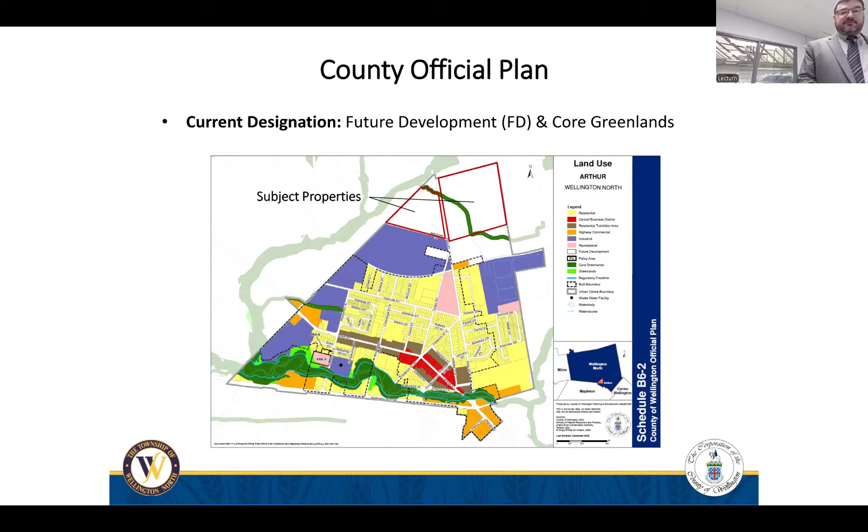The property is currently designated as future development and core greenlands in the County of Wellington official plan, and is currently zoned future development in the Township of Wellington North zoning bylaw.

The Wellington North Growth Management Action Plan identifies the properties as a future development area.

To discuss the proposal: an official plan amendment, a draft plan of subdivision, and a zoning bylaw amendment application have been filed with the County of Wellington and the Township of Wellington North for a proposed residential development.

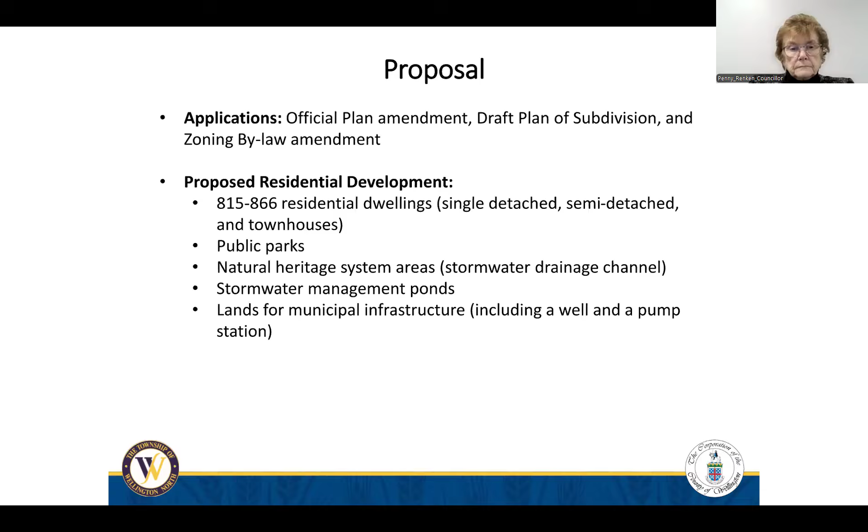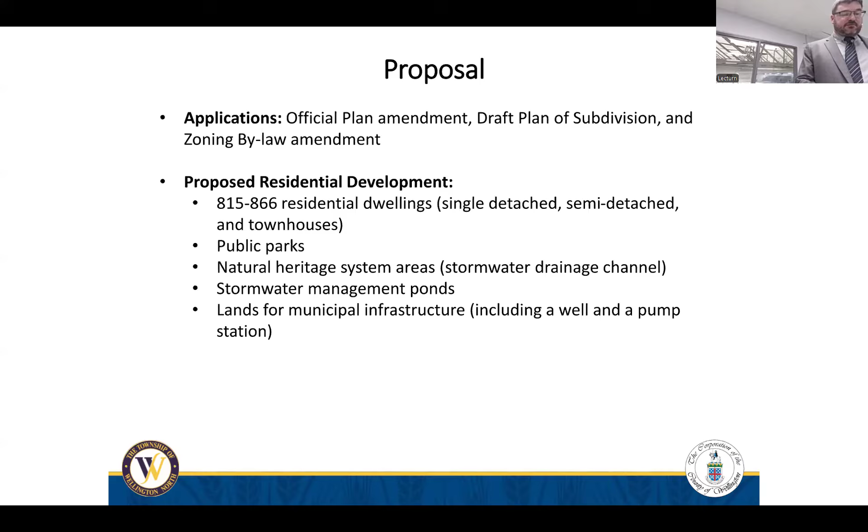The proposed development includes 815 to 866 residential dwellings, including single detached, semi-detached, and townhouse dwellings. It also includes public parks, natural heritage system area, stormwater management ponds, as well as lands for municipal infrastructure, which could include land for a well and a pump station.

Shown on the screen here is a color concept plan which shows the proposed development's layout.

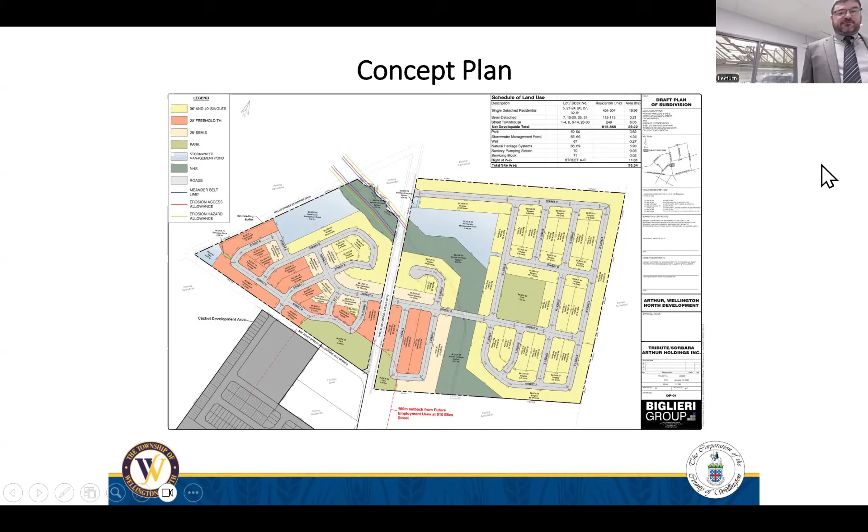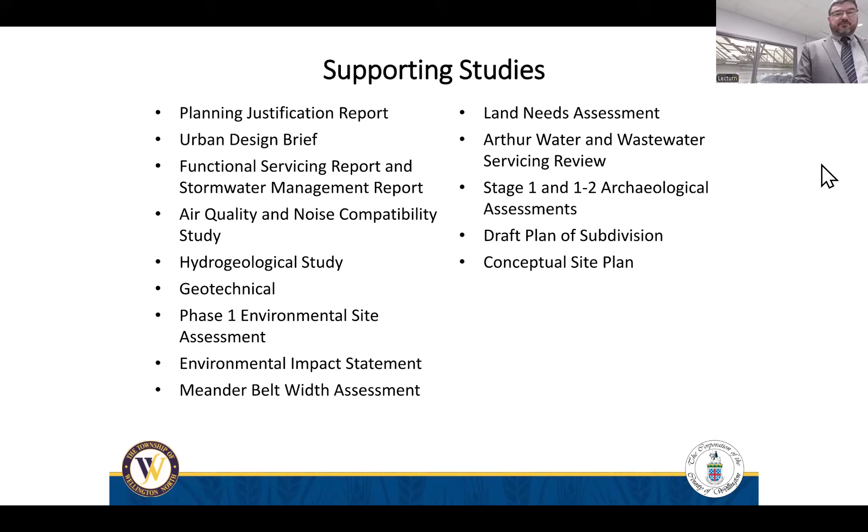A series of supporting studies have been submitted to the township and county in support of the applications. These studies have been circulated to departments and agencies with the applications for review. I'm not going to go through all of them, but there's a list.

The purpose of the official plan amendment is to redesignate the lands from future development to residential and open space. This is a draft of the applicant's proposed official plan amendment schedule.

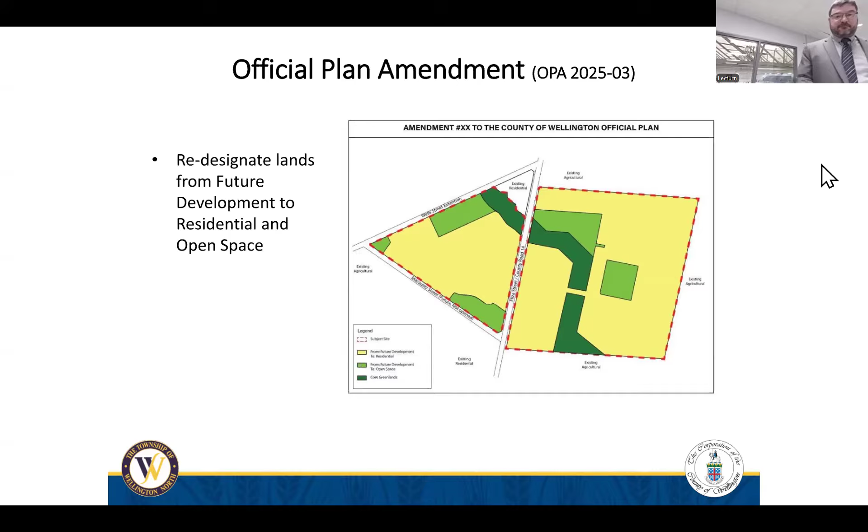The proposed draft plan of subdivision includes 454 to 504 single detached dwellings, 112 to 113 semi-detached dwellings, 249 street townhouse dwellings, 3 park blocks, 3 natural heritage blocks, a pump station and servicing blocks, as well as stormwater management blocks.

The proposed access to the site would be from Eliza Street and from Macaulay Street.

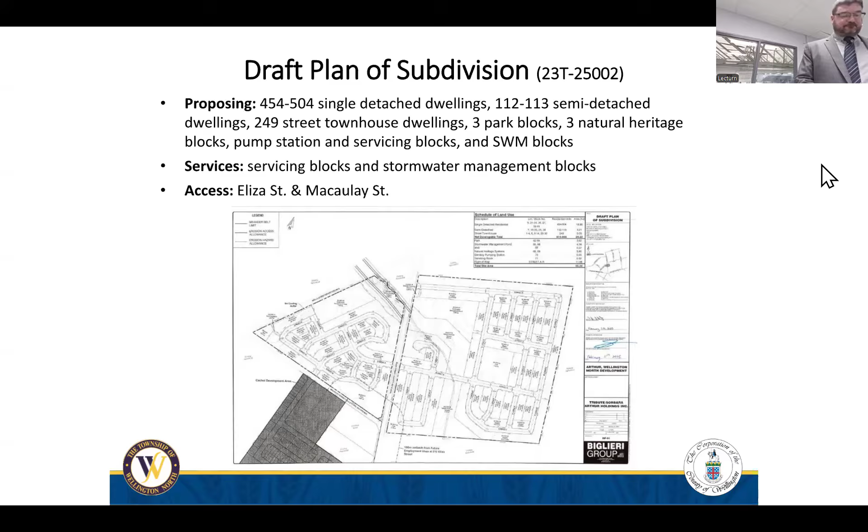The purpose of the proposed zoning bylaw amendment is to rezone the subject lands from future development to medium density residential site specific, natural environment, and open space zones. Site specific zoning is also proposed for a reduced lot area, lot frontages, side and rear yard setbacks, and an increased lot coverage.

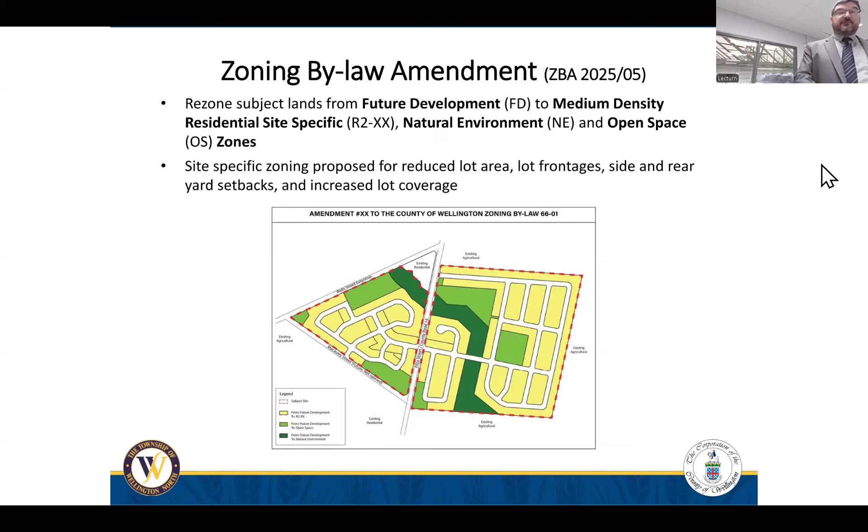The provincial planning statement provides policy directions on matters of provincial interest related to land use planning and development. A summary of the most relevant provincial planning statement policies is provided in the report, and these policies will need to be considered in evaluating the applications.

Now we're talking about Wellington County official plan policies. A review of the applicable official plan policies is provided in the public meeting report.

A few policies worth highlighting include the future development policies, which outline objectives for future development lands: to provide for orderly future development of the unbuilt areas of the urban center; to limit development of such lands to current uses until an official plan amendment, including a proper site plan or concept plan for future uses, has been submitted and approved; and to prohibit development of these lands until the necessary municipal services can be made available for such areas.

The official plan also provides direction that's worth noting about when and how future development lands can be redesignated for other uses, such as when there is a need for the land and development, and that the proposed use is compatible and can reasonably and economically be serviced.

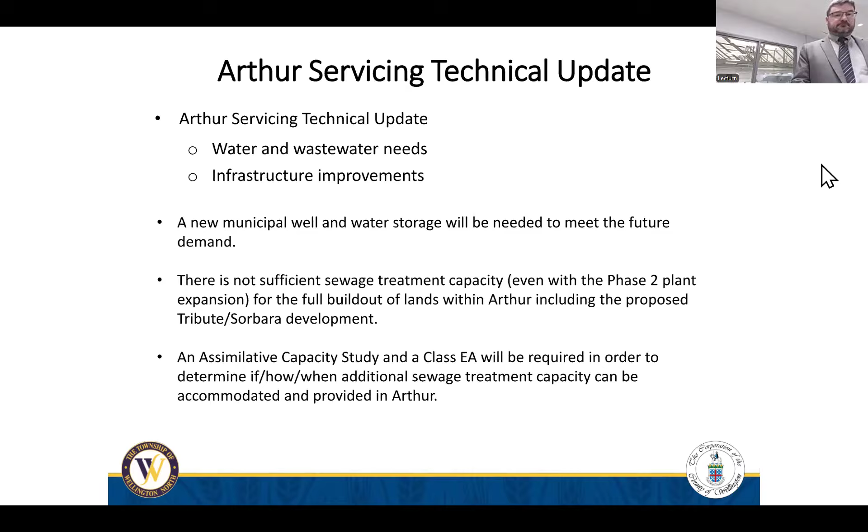The township and county have commissioned peer reviews of some of the studies submitted in support of the applications. A brief review of the peer reviews is provided in the public meeting report, and the peer review comments have also been included in the council agenda package for tonight's meeting. The peer reviews have identified outstanding matters and include comments for the applicants to address. I also want to recognize that Monteith Brown, our peer reviewer for urban design and parks, will be providing additional information and comments following my presentation.

The applications were circulated to commenting agencies and departments. The comments received have been summarized in the planning report and included in the council agenda. The agencies have identified outstanding matters that the applicant will need to address. One comment of note tonight is that the Upper Grand District School Board has indicated that 5 to 6 acres of land is needed for a future elementary school site in the development.

This concludes my planning portion of the public meeting. Next, I'm going to call up Monteith Brown, our peer review consultant, who will provide an overview of their peer review comments. Following them, Tammy Stevenson from the township will introduce Triton Engineering, who will provide some comments on servicing. Thank you.

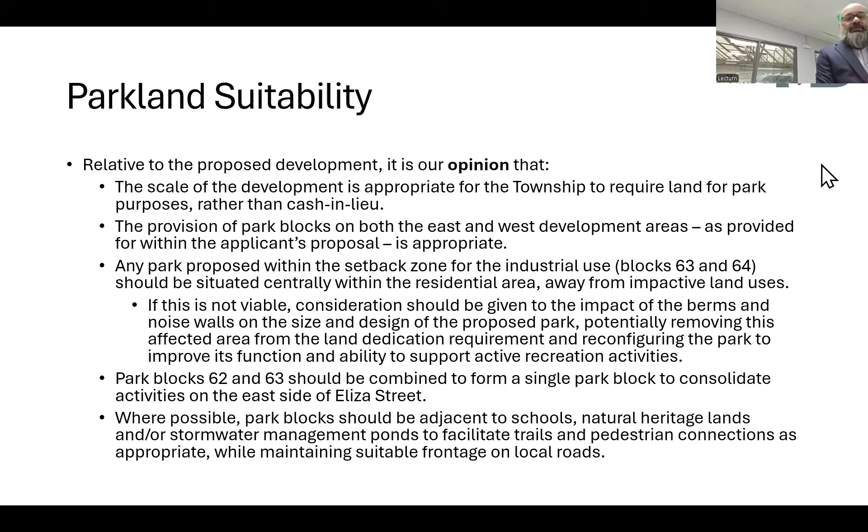From an amenity perspective, the township is guided by its 2018 Parks Recreation Master Plan, which was informed by public input at the time it was developed. Looking at the master plan in relation to this application, we want to note that the scale and location of parks and overall development across the township really does play a role in influencing the types of amenities needed to serve growth.

Within the application, the park blocks being proposed would meet the definition of neighborhood level parks. We assume that based on 866 proposed housing units, assuming 2.6 persons per unit, that could yield a population around 2,250 persons. We also note that the land we're on today, the Arthur Fairgrounds Park, is about roughly 500 meters south of the subject site.

It provides a number of higher order fields, both indoor and outdoor, and those types of amenities we see here today are appropriate for a community park. Some of those higher order amenities are not necessarily what we would expect to see in a neighborhood level park.

From a playground perspective, however, we do believe those are amenities one would want to be able to walk to with young children safely. As such, we would see them provided on either side of Eliza Street to meet the 500-meter target established in the township's master plan. That's about a 5 to 7 minute walk.

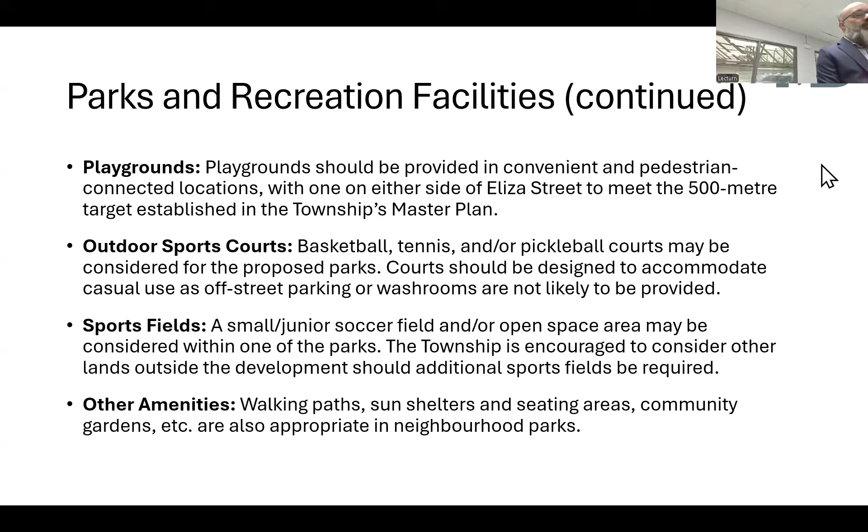In terms of other amenities one would find typically in a park, walking paths, sun shelters, seating areas, and community gardens may be appropriate in neighborhood park settings. With that, I will pass the floor to Jay McGuffin.

Thanks, Anand. Can everybody hear me? Is this up high enough? Jay McGuffin, Monteith Brown Planning Consultants. Very well. How's that? There you go.

Good evening. So I'm here to speak to the subdivision design elements. My area of practice is land use planning and urban design. I've broken down the comments on the peer review into sections for digestion for the meeting this evening.

So the first element I'll speak to is the design element of land use compatibility and how we would look to address it. As was mentioned earlier, there were a number of impact assessments provided as part of the application - air, odor, and noise. All of those impact assessments had recommendations for mitigation, and there are design approaches that can be brought into effect in terms of how to address that mitigation.

A class 2 designation, as identified in the plan, requires a 100-meter buffer. There were noise berms proposed that ranged in height from 2.5 meters to 6.5 meters. 6.5 meters is an extremely tall berm - to give context, you're talking about a berm that's 20 feet high, with noise walls perched on top of some of the berms to create a protected acoustical environment and prevent dust exposure into the adjacent areas.

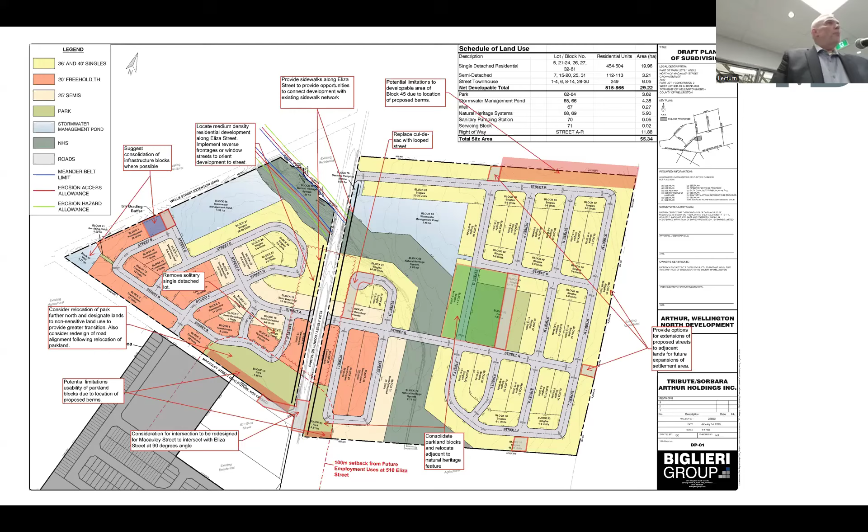Good evening, I'm Tammy Stevenson, Manager of Infrastructure and Engineering with the Township of Wellington North. To support future development, the Township undertakes a range of studies to ensure appropriate planning and infrastructure are in place to service existing and future development lands.

In 2026, the Township will complete a transportation and mobility master plan, seeking public and stakeholder input to inform future planning of roads, sidewalks, and trails throughout the community. Recently, the Township completed an update to the Arthur Water and Wastewater Servicing Master Plan using growth projections from the Township's Growth Management Action Plan. This update evaluated Arthur's water supply and distribution system and wastewater collection and treatment system to assess existing conditions and identify future servicing requirements needed to support community growth to the year 2051.

The updated servicing master plan concluded that Arthur faces several servicing challenges that limit its ability to accommodate future development. The Township's consulting engineers, Triton Engineering Services Limited, will provide an overview of the servicing challenges in Arthur as related to the proposed development. In conclusion, sufficient servicing capacity is not presently available to serve the proposed development and the full build-out of Arthur.

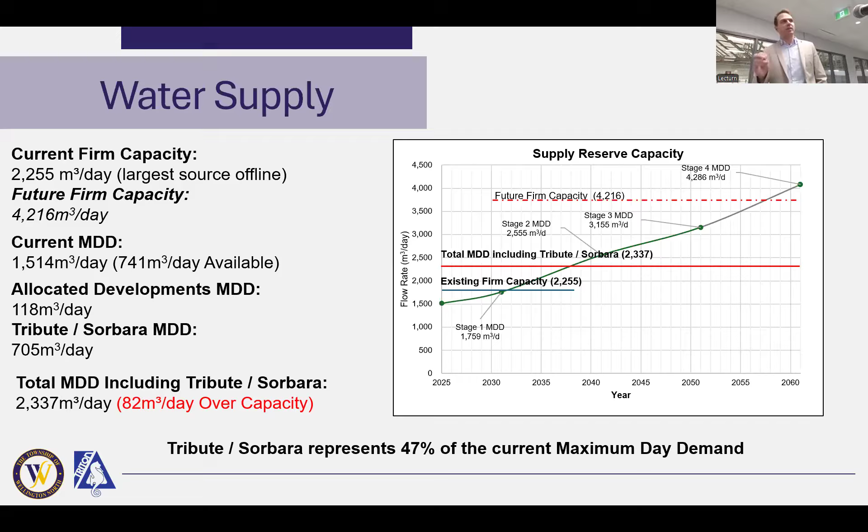In the future, when that new well is online, there is capacity. But if you look at this chart, if we take all the development lands within the community, we get to about 4,286 meters cubed per day. So again, we're slightly short. That would be something you'd look at closer to, but that's beyond 2061.

So then the next thing we look at is water storage - the spheroid water tower and the multi-leg water tower. Within those two towers, you have about 1,300 meters cubed of storage. You calculate the amount of water storage needed based off multiple factors, but the big one is fire flow - how much water you need to put out a big fire in town, and how much you need to meet fluctuations in maximum day demand, peak hour demand.

So currently, our amount of storage required is about 1,120 meters cubed. If we consider the developments we have allocated, we need about 1,191 meters cubed. If we look at what the Tribute Sorbara site needs, it's about 630 meters cubed.

So if we look at our total storage required, including Tribute Sorbara and what has been allocated, we're almost 500 meters cubed over capacity. Tribute Sorbara represents 35% of that storage required and 46% of the current storage available.

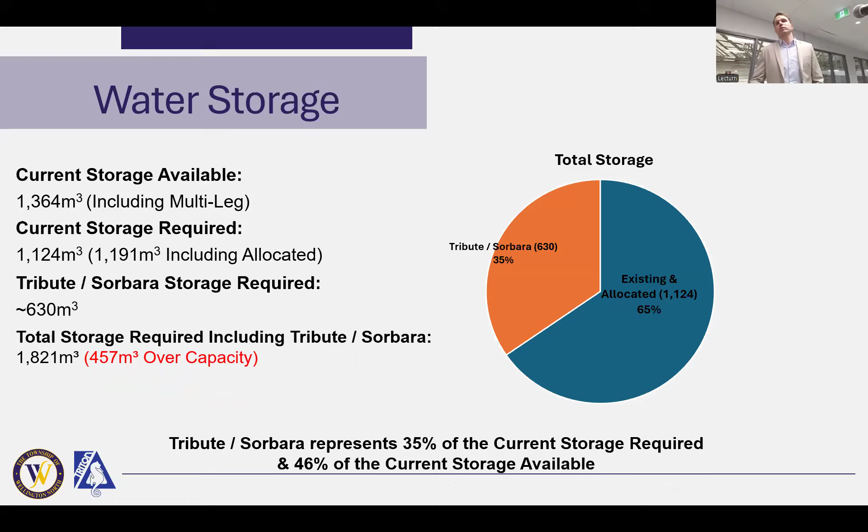So then moving on to how we get the water to the site. Arthur currently has 21 kilometers of water main, over 1,300 services. Our pipe materials vary from PVC to cast iron, ductile iron. Some of the older stuff is nearing the end of its service life. This is all sort of thing that was talked about in our technical study if you're interested.

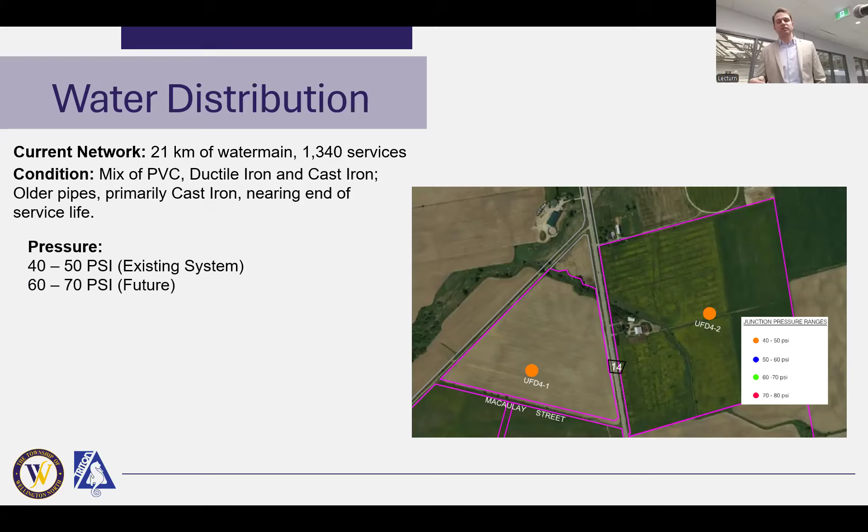What really matters when you're talking about distribution is pressure and availability of water for fighting fires. It's kind of hard to imagine because you think of Arthur being relatively flat, but as you head out on Eliza it does come up, and as you go up, your water pressure goes down. So this site right now, connected to the existing system, would have a pressure between 40 and 50 PSI at ground level - that's not even considering what the pressure is at the top of upstairs bathrooms. So that's a little low, not ideal.

However, in our water EA that we have basically finished, we established that in the future it would make sense to increase the pressure in the whole town by about 10 PSI. That's great for everybody in town, and it also services these future development lands properly. So the future water system, where we no longer have the spheroid tower or the multi-leg tower, we've got at least one new water tower, likely two as we've recommended. The pressure will be about 60 to 70 PSI, which is good.

When we're looking at fire flow, similar results. Fire flow is a very complicated calculation. Generally the rule of thumb I see a lot is you want 70 liters per second at absolute minimum for a typical residential development - 100 liters a second is better. In this case, under our existing system, based off some high-level assumptions on how we even get water to this site, we're looking at about 43 to 59 liters a second. So there's not enough water there for firefighting under the existing system.

Again, the water municipal class EA considered this and has strategically, conceptually placed future water towers and systems, and under that concept we get over 200 liters a second. So again, in that future system, we do achieve the minimums.

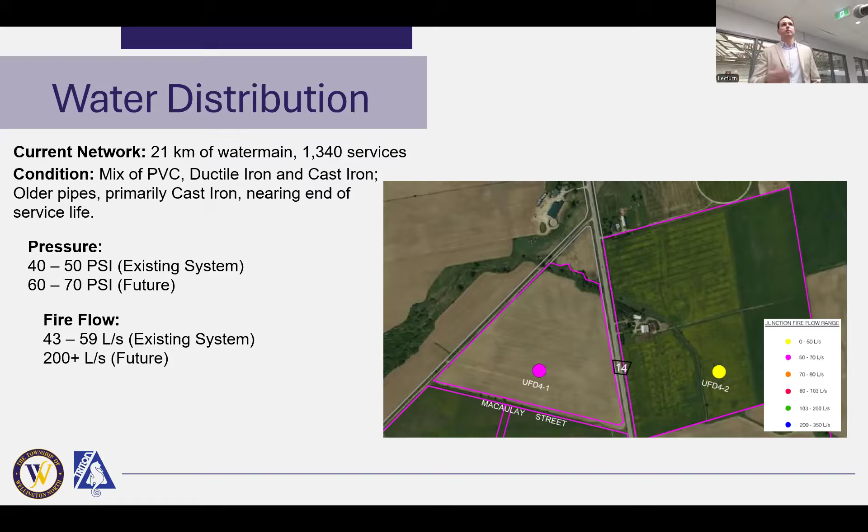Okay, so we'll go on to what I would call the hot topic in Arthur, and that's sanitary treatment. A couple of years ago, the township undertook a municipal class EA, and that determined that they should upgrade the wastewater treatment plant in a phased approach. Phase one upgraded the plant to 1,860 meters cubed, which has been done and is operating. Phase two was 2,300 meters cubed.

Phase two has not been undertaken at this point. The current average day flow, the amount of sewage existing residences are conveying to the plant right now, on average over the last 3-year average, is about 1,300. That leaves about 500 meters cubed a day left over. You'd never want to operate at 100% capacity, because you'd have no room for high flow events, so I'm not saying there's 500 meters cubed available to allocate, but that's how much remains.

Currently we have allocated 155 meters cubed. That's all the developments that have been granted allocation through that allocation bylaw. If we look at what Tribute and Sorbara need, these are high-level predictions based off the plans we've seen to date, we're looking at about 824 meters cubed a day in need.

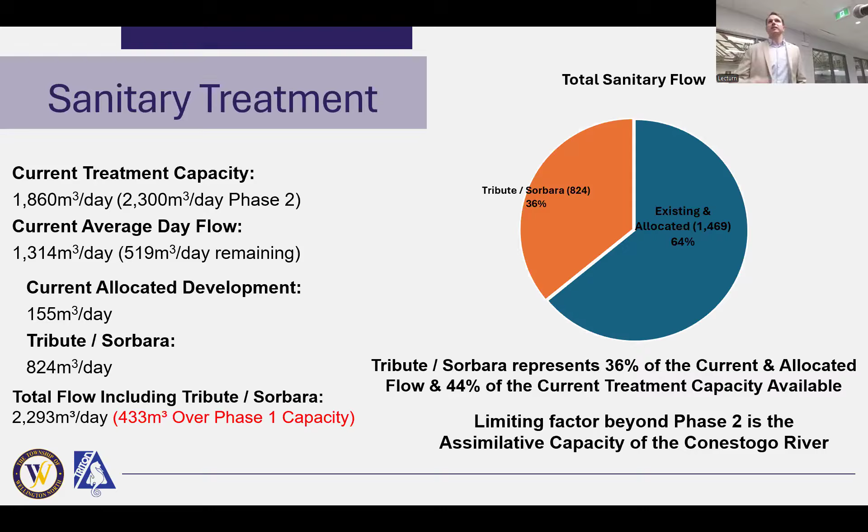There are options - you could split the flow and send it further downstream with lots of pumping, or do some land application partially. There are options, but they're all costly and challenging.

So let's say we can get the treatment - how do we get the sewage to the treatment plant? Looking at the existing system, the nearest viable service is 450 meters away, across unopened right-of-ways and private lands. There's another existing sanitary sewer on Tucker and Eliza, however the downstream sewers are not designed for this size of area, so they can't take it. Beyond that, they go to a sewage pumping station.

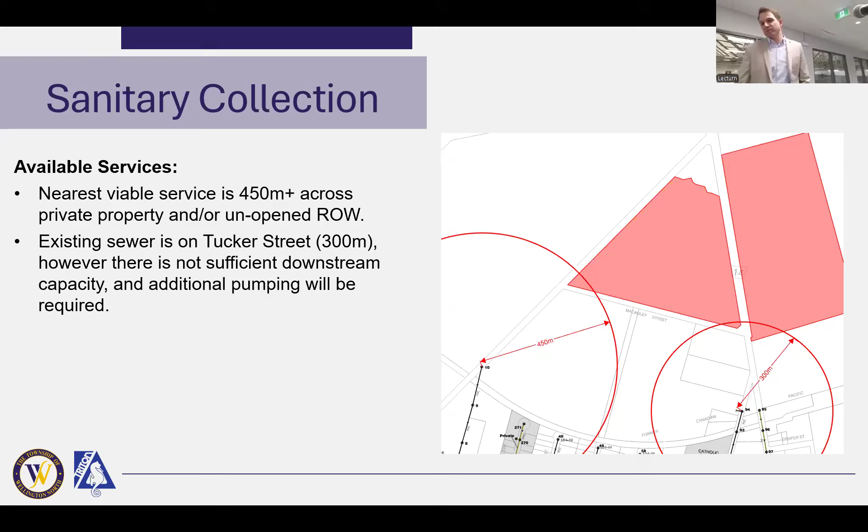As Curtis mentioned earlier, there's going to be a sewage pumping station within this site. Pumping to pump is really inefficient - it's not good use of ratepayers' money, especially in a smaller community like this. And the sewers can't take it anyway. So we really need to get that sewage to the manhole that is just up on Wells Street there.

Moving on to stormwater management, pretty standard stuff in this situation. It's got to comply with ministry guidelines and GRCA requirements. Ultimately this stormwater is going to discharge into that creek there that you see on the screen.

A full assessment of that creek would need to be undertaken to make sure we're not causing washouts, erosion issues, or downstream flooding of any private property. The other thing you always have to be cognizant of with these developments is groundwater recharge.

Just a quick summary of what that is: if you think about this site right now, it's an open field - raindrops fall, go into the ground, down to the groundwater table. When you build a subdivision on top of it, with houses, roads, sidewalks, all this impervious area, the water doesn't make it into the ground, so you're starting to decrease the amount of water in your underground aquifers. To mitigate that, you collect your rainwater, whether through roofs or treat it through the stormwater management facility, and then put it back into the ground somewhere else. So you've got to recharge that rainwater into the ground - that's something we'll want to make sure happens in this case.

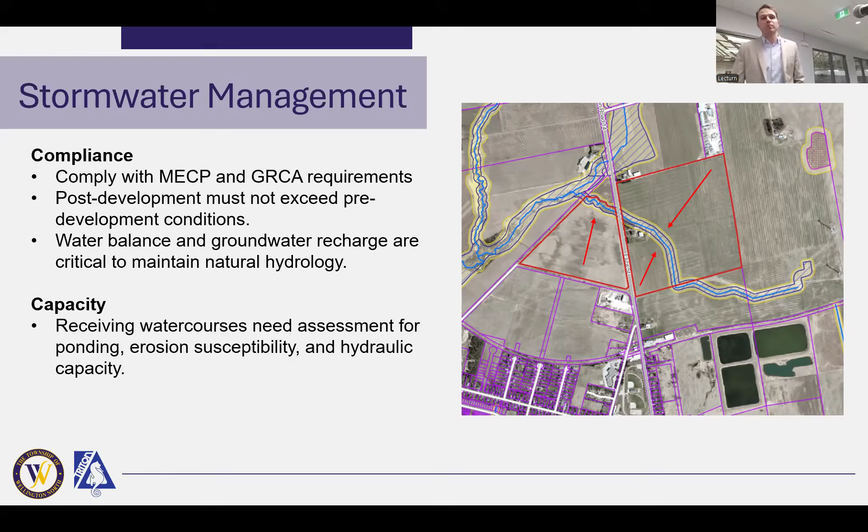And then traffic - there was some good discussion on that earlier. We basically had all the same findings.

As Tammy mentioned, the township is going to be undertaking a transportation mobility master plan. It's going to be imperative that this development consider that, and the future road layout will need to consider all the things that have been talked about: sight lines, separation distance from other intersections. It's important to note that Eliza is technically a county road through there and is considered an arterial.

So you really want to limit the number of intersections onto that, because you run into complications with conflict. And in the same breath, we definitely want to promote pedestrian use. We don't want a development that's an island out there with no way for people to get back into town safely as pedestrians. So these are all things that will definitely have to be considered through the master plan.

And the other thing that sometimes gets missed in these communities is the other uses like ATVs and snowmobiles. Even on this site, the snowmobile trail goes right through there. Is that something the township council is going to want to maintain or provide accommodations for?

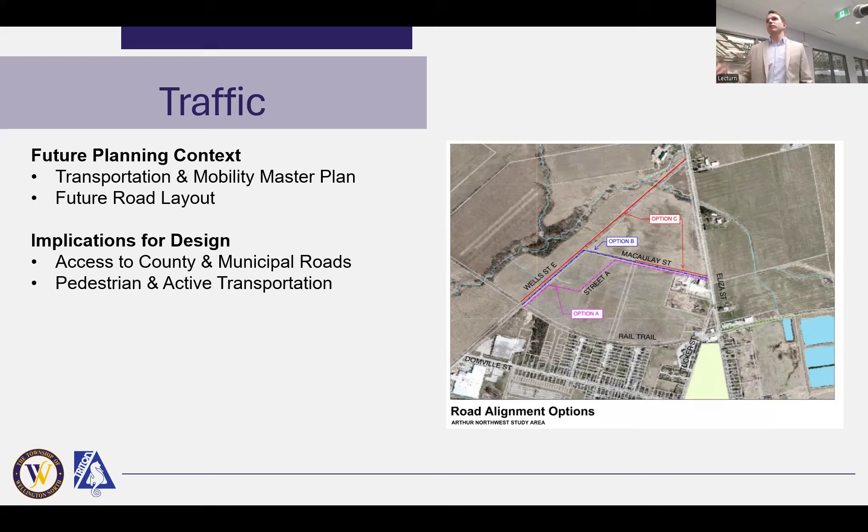Next slide. So that's all I've got.

In summary, we've looked at the potential growth, we've looked at our shortfalls that relate to supply, and we've looked at our potential shortfalls as it relates to storage, water distribution, treatment capacity, all these things. So it will be important for the township council to consider this development, because it is the trigger for a lot of things that will need to happen as the growth in Wellington North and Arthur particularly moves ahead.

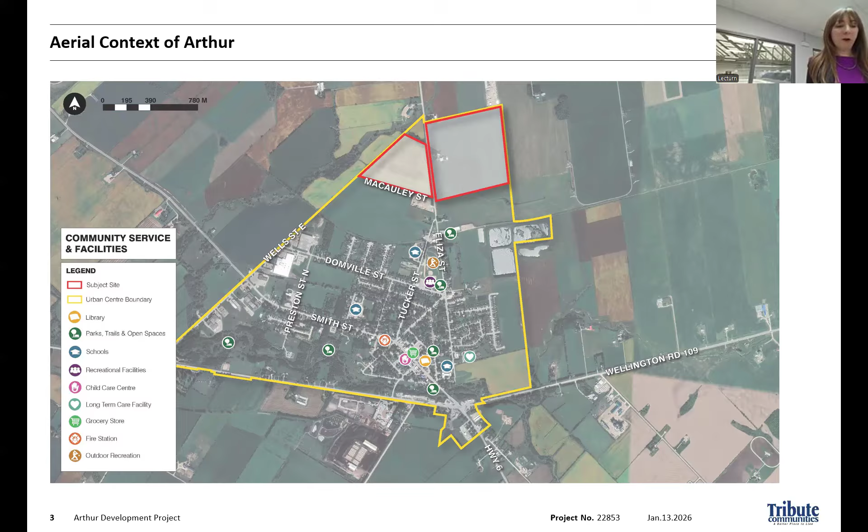To provide more detailed context on our property, there are two separate properties located on the east and west side of Eliza Street. The total size is 55.34 hectares combined, which is about 136 acres.

The eastern parcel is 38.16 hectares and the west side is 17.18 hectares. The net developable area on these two properties is about 26 hectares. Frontage on Eliza along the eastern property is about 637 meters, while the frontage on Eliza for the western parcel is 452 meters, and 595 meters frontage on Macauley.

The western property was previously subject to applications for consent and rezoning, which allowed for a single detached dwelling to be located on that northern tip of the triangle, which is now gone. The eastern portion has frontage along Eliza, whereas the western property has frontage along Eliza as well as Macauley and Wells Street, although Macauley and Wells are currently unopened.

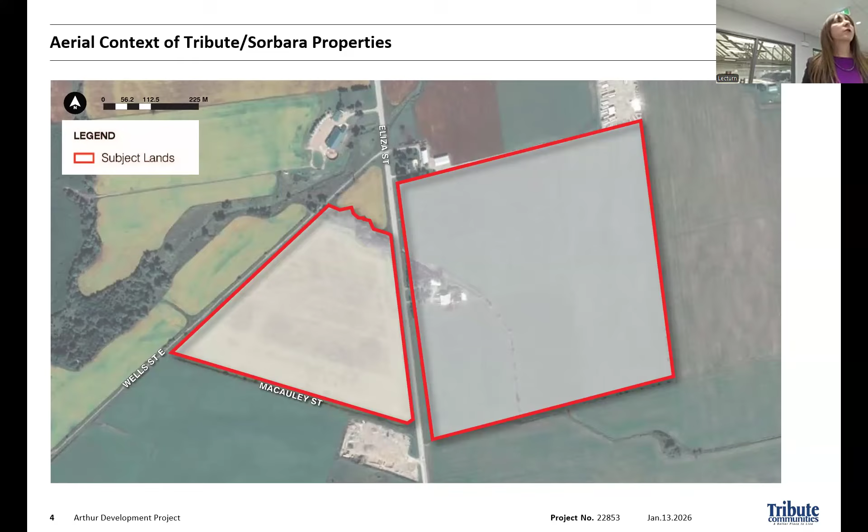The original plan proposed 815 to 866 units, representing a mix of single detached, semi-detached, townhouses, as well as parklands, stormwater management blocks, natural heritage corridor, and a block for a future municipal water tower.

This was the first submission, and we recognize that there would likely be amendments made to this plan as a result of comments that we received back from both the public as well as the township, county, and their peer reviewers.

An applicant-led public open house was held on June 19th in the Arthur Arena to provide information to residents, and I'm happy to see a number of familiar faces in the crowd tonight who are also at that meeting. Approximately 40 members of the public attended and provided us a range of comments as well as engaged to find out more about the application.

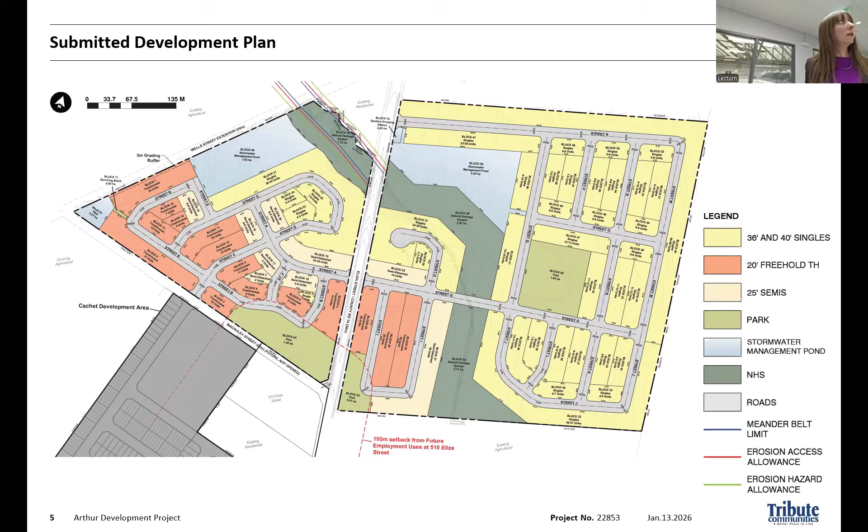The township and the county have both requested a 100-meter setback to all employment lands, including those that are undeveloped. Although there's no justification in any of the D-series guidelines or any of the information that we have reviewed, this setback has been provided as requested.

And the modifications resulted in a loss of approximately 100 units, but it still plans on maintaining the mix of single detached, semi-detached, and townhouse dwellings. The plan continues to provide a parkland rate of greater than 6% of the total area. And as we continue to respond to the comments from council, from staff, as well as the public, we assume that there will continue to be changes to this plan.

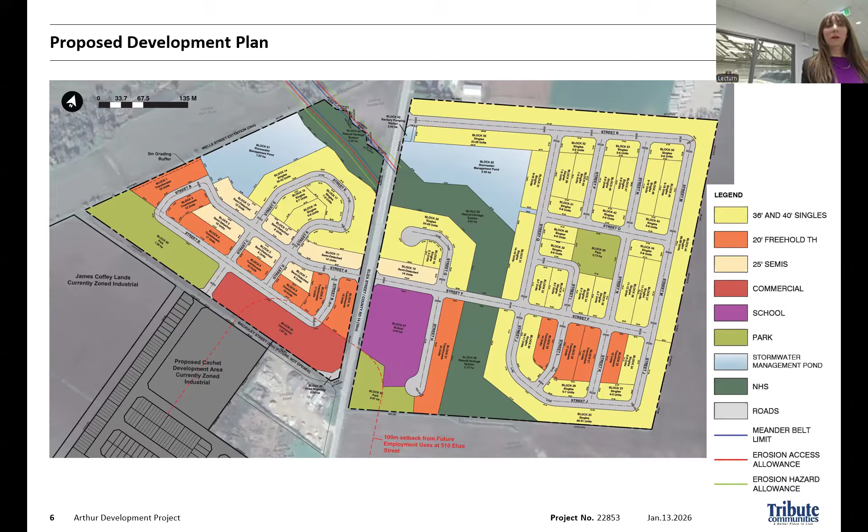To get into the more detailed studies that were completed, a natural heritage study and an environmental impact study, or EIS, was completed in support of this application to identify any natural heritage features on the property, investigate the presence of any species at risk, and identify any mitigation measures required. No species at risk were identified as part of the on-site investigations.

The existing channel that runs through the site from the north on the western parcel, and then through almost the middle of the eastern parcel, was reviewed. A portion of this channel will be rechannelized as well as put into a block within the development. Currently, the farmers are plowing up to the edge of that channel, and as a result, we'll be putting a buffer in place to create better protections for that channel.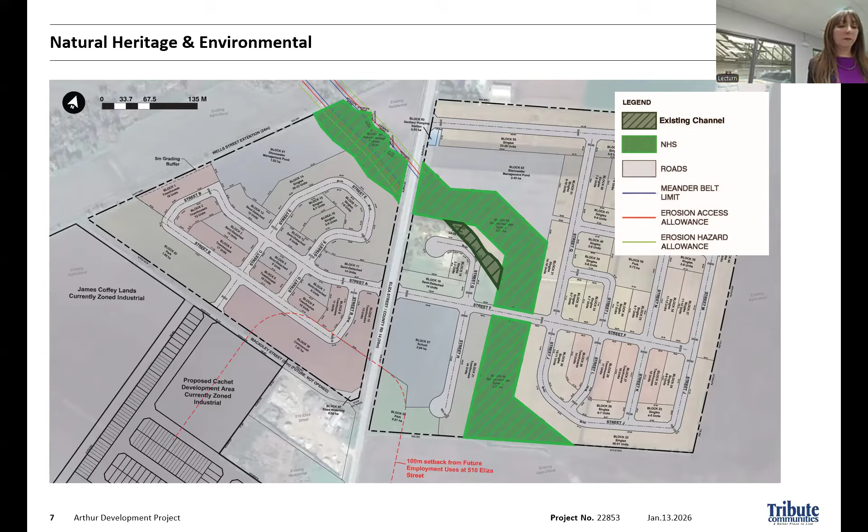As a result, the naturalization cover of this channel will be approximately an area of 4.959 hectares, whereas the existing channel is currently 0.97 hectares of protected area. So we will be significantly increasing the protections for that channel to create a naturalized area.

Coming into this application, we were very aware that one of the key items we needed to review were the servicing limitations within Arthur and the lack of services currently at this property. As outlined within the Arthur Water and Wastewater Technical Study Update dated November 2025, the overall wastewater solution for Arthur is an expansion and is currently under review. The existing Arthur wastewater treatment plant has some residual capacity, along with the ability to expand the existing wastewater holding ponds. Ongoing discussions with the township are in progress to determine overall solutions to this issue.

In terms of the required internal services to service the proposed development, an internal sanitary pumping station located east of Eliza is required, and the proposed sanitary sewers along Macauley Street and Wells Street will be required to connect to the existing sanitary sewer system within Wells Street.

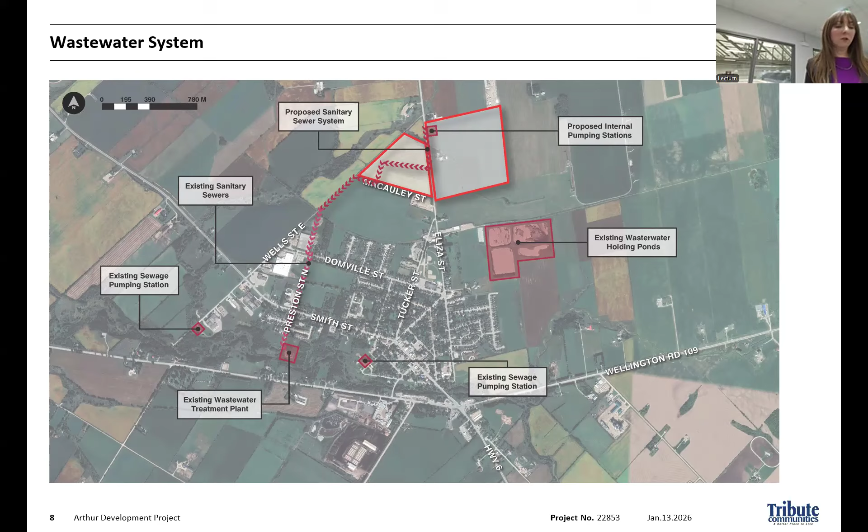With respect to the water system, the new development in Arthur is proposed to be serviced by a proposed new well and elevated water reservoirs. One new tower is proposed to be located at Macauley Street and Wells Street, and one north of the existing wastewater holding ponds. The subject lands have been accounted for as future development when considering source capacity, storage, and water distribution requirements as outlined in the Arthur Water and Wastewater Technical Study Update, dated November 2025. The proposed development will utilize the proposed new well and elevated water reservoir, new Tower 1, via proposed water mains along Eliza Street, Macauley Street, and Wells Street.

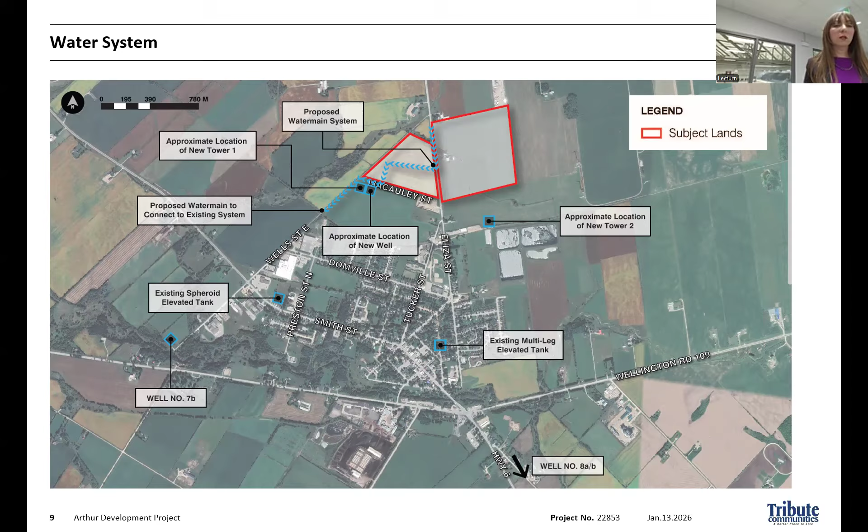For the stormwater system, stormwater drainage from the proposed development will outlet to the existing tributary which runs through the subject lands. Stormwater runoff from the proposed development will be provided with quality, quantity, and erosion and volume control by two proposed stormwater ponds. The proposed stormwater management ponds will be designed in accordance with the Grand River Conservation Authority, Ministry of Environment, Conservation and Parks, and Township of Wellington North engineering criteria.

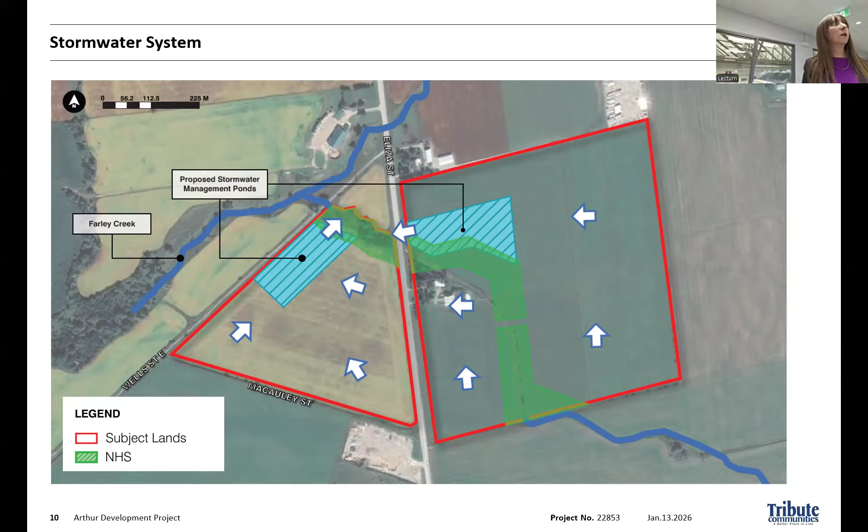The subdivision is designed to be comprised wholly of municipally owned roads once constructed, meaning no condominium roads are proposed. Three new connections to Eliza Street are proposed, two on the eastern parcel and one on the western parcel. One new connection to Macauley Street is proposed along the western block.

A TIS, or traffic impact study, was completed to examine the impact of the proposed development on all of the local road network within Arthur. The current traffic levels were examined, as well as the projected traffic levels based on full build out of the subdivision. All intersections examined will continue to operate at a good or higher level of service.

As part of the development, Macauley will be extended to our proposed entrance. The future extension of Macauley, as well as Wells, and then Wells to Domville, will be extended at the pleasure of the township when it deems appropriate. We understand now that the township is undertaking a transportation master plan to examine the transportation needs for the entire community.

Given the time that our consulting team has taken to study the traffic levels in Arthur and their level of expertise, we continue to look forward to working with the township and their consultants to provide information regarding our traffic projections, as well as justification for our proposed access points.

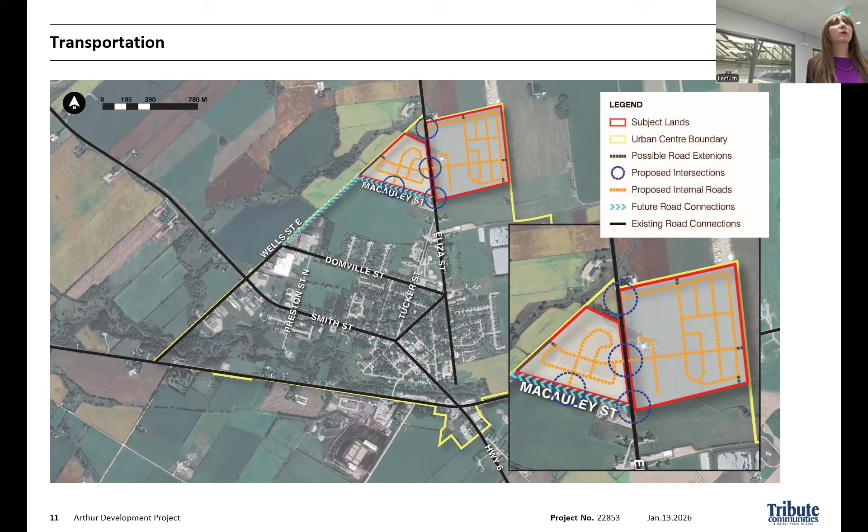A noise and compatibility study and air quality study were completed to investigate noise, compatibility, and air quality for the existing industrial uses to the south, particularly the Clark Brothers Contracting and the future Teeswater Concrete Plant. There are additional lands along the south side of Macauley that are zoned and designated employment. However, there's a holding provision in place that doesn't allow their development until such time as servicing is in place.

On the east side of Eliza Street, the lands to the south are also zoned and designated for employment use. However, there is a site-specific zone on them which allows them to only be used for the wastewater holding ponds.

As part of the ongoing consultation with the township and the county, we have been requested to provide additional information regarding the mitigation to these potential employment uses on the south side of Macauley. This is currently being undertaken by our team, and we're relying upon the permitted uses within the zoning bylaw to dictate which types of uses could be allowed.

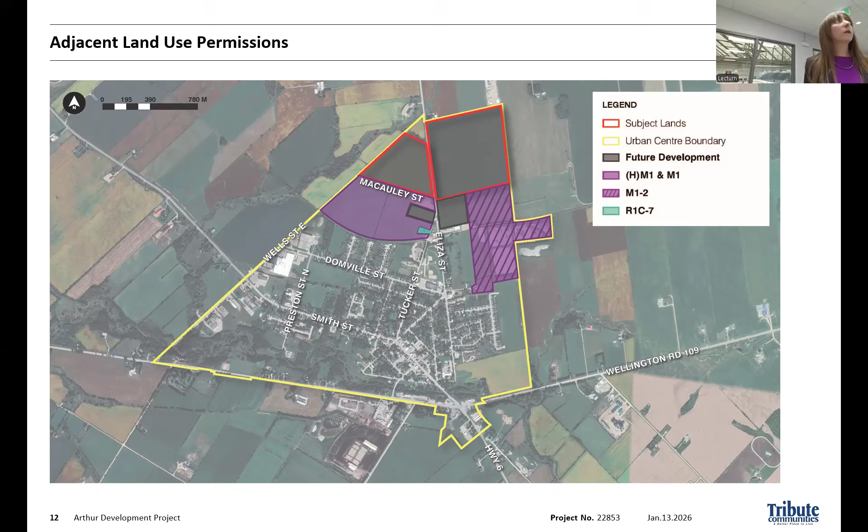In addition to the noise report, air quality was also considered with respect to the neighboring land uses. The rings on the map identify buffers: a 20-meter buffer shown in blue, a 70-meter buffer in pink, 300-meter in green, 1,000-meter in blue, and 1,500-meter in yellow.

Within these buffer areas, land uses which have existing or applied-for environmental compliance approvals were reviewed for air quality, as well as examining the agricultural land uses within those rings in accordance with the minimum distance separation calculation and guidelines. Both the noise and air quality reports reviewed the D series guidelines to provide guidance for appropriate setbacks.

Our consulting team continues to work with the township and the county, as well as their peer review team, to provide updated information for both of these studies. However, we feel that the proposed design appropriately has regard for and mitigates against impacts from the neighboring existing uses.

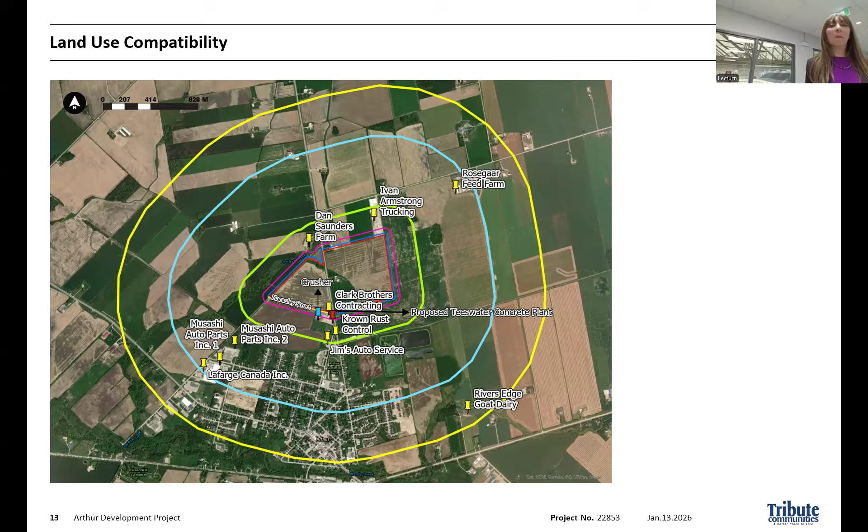The subject lands are currently designated as future development within the county's official plan, and it's identified that the land will not be required to accommodate growth until the year 2051.

As part of our submission, a land needs assessment was completed to look at when these lands would be needed and the appropriate type of land use. Given the changes to provincial documents and provincial guidance regarding growth needs, we are of the opinion, based on the analysis from the province and based on our review, that these lands will be needed prior to 2036 to meet the demand of growth in Arthur.

In addition to reviewing the need for these lands for residential purposes, we also examined whether or not these lands would be needed for employment uses. Based on our review and based on the Township of Wellington North Community Growth Plan and the Growth Management Action Plan, it was demonstrated that there would be an excess of 70 hectares of employment lands to 2051. The land needs assessment has identified that these lands would be needed for residential purposes prior to 2051.

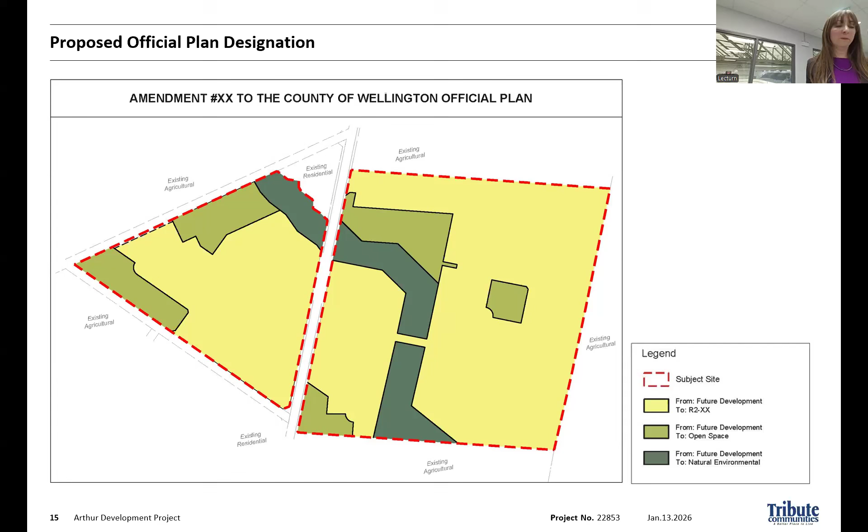An amendment to the zoning bylaw has been made to implement the proposed changes within the official plan. Site-specific provisions have been included to reflect modified provisions for the dwelling types we've proposed. The parks and stormwater management facilities will be put into an appropriate public use category.

The commercial zone for the commercial block will be required to permit local level services that will serve just the immediate community. The intent of this block is not to become highway commercial or to serve a larger area. It's identified that there will be a need for local services in this area.

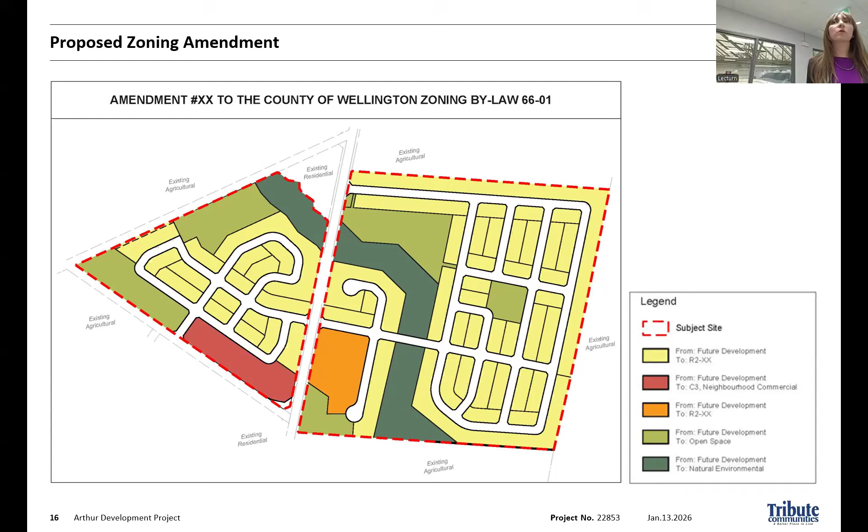It's proposed that the school block will be provided with a holding zone and provisions that would allow it to be used for residential purposes should the Upper Grand District School Board determine that a school is no longer required on that site.